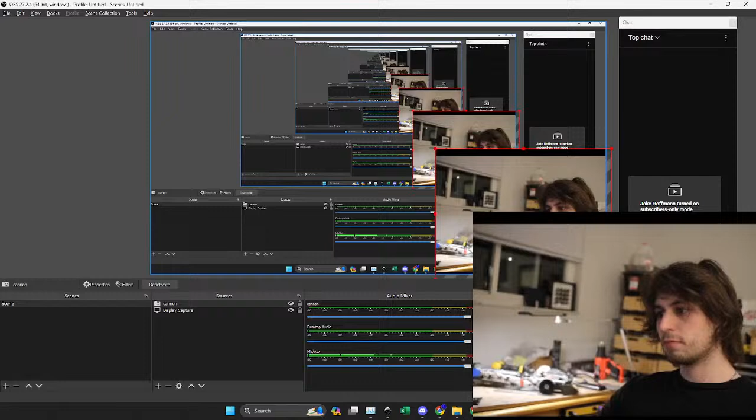Ooh. Yeah. Okay. Cool. Ooh. Does it sound okay? Yeah. Okay. Uh-oh, we're gonna get... Cool. Does it sound okay? Yeah. Okay. Alright.

Let's get a thumbnail on this bad boy while people come in. Does it sound okay? Cool, I'm excited for this. Alright. Let's get a thumbnail on this bad boy while people come in.

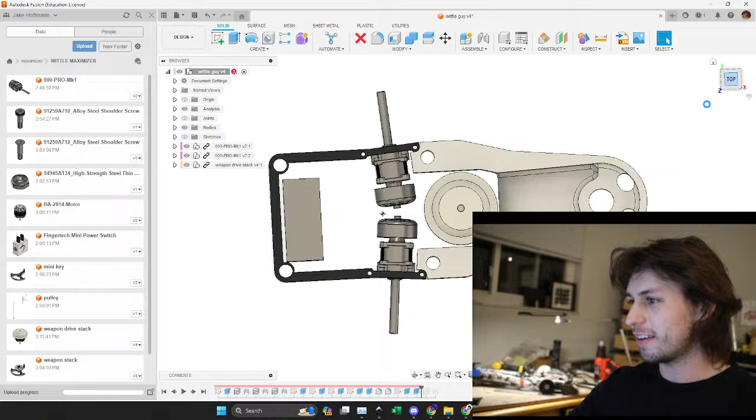And it shows why I have the, right? Okay. It shows why I have the 90-degree gearbox on Max, because this is what you get, which is a massive pulley in the back to get the right gear ratio. And this is just silly. And this was using a 2814, which is pretty standard for 3s is what I read.

But I have all these massive Sunny Sky 5210s sitting around, so it's like, why am I not just using that? So we're gonna switch this over. I realized after that I can just use the 5210.

So let's do that. Is there a way for me to see chat while I do this? Or can I? Ooh. I'm gonna do that. That's kind of mid, but we'll roll with it. Since my face is down, if I do that.

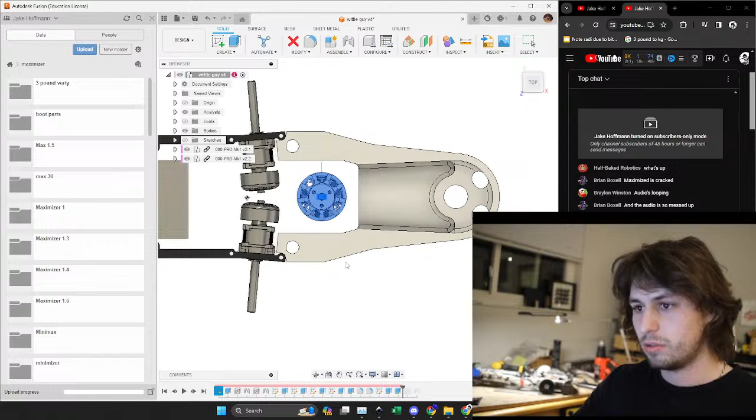This is sick. No, I'm excited about this. I'm excited about streaming this process. I swear my tech skills with the stream will get better, but we're just gonna do this for now. I was also thinking if people wanted it, I've got some friends playing Fortnite right now. We could play Fortnite later. It would be sick.

Okay, I'm gonna copy this over. My headphones wouldn't connect either, so I'm designing without music, which is very weird for me. So if I seem a little... this will be fun. I'll enjoy this.

So I have these aluminum pulleys, but I don't know if aluminum pulleys are too much for threes. I've got them somewhere. I have a box of 5210s, a massive box of 5210s, and if we just go ahead and use that, we can do that. So how tall is this stack as well? 36 millimeter, 1.5 inches.

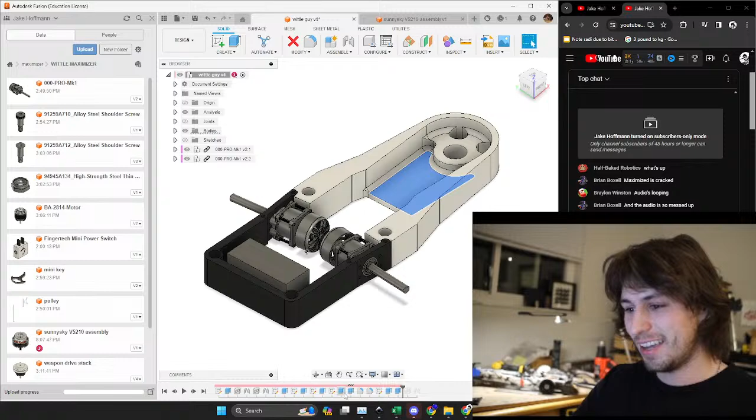I have my spreadsheet as well with all my conversion factors. So the scale factor from 12 to 3 is just 0.632. So if I don't know what dimension it should be, I've just been typing it into this, and I'm hoping it makes it look like I just hit Maximizer with a shrink ray, and that's how I want this thing to look.

But it's also allowing me to try some stuff that I haven't tried in the 12, like mounting the, ooh, this is 60 millimeters diameter. Dang, it's a big boy.

I'm gonna need to bring in some special guests to help me with a 3s. People who know what they're doing, because I don't. See, because that wall is getting too narrow there is the issue. It's like coming in on it.

But this pulley is a nice size. Because if I'm at 300 kV, 14.8 volts, I don't know about what that pulls. But if I'm at, because that's a 1.4 inch diameter. Again, I can probably just 3D print a new nylon one, like the aluminum. I don't know if that's needed

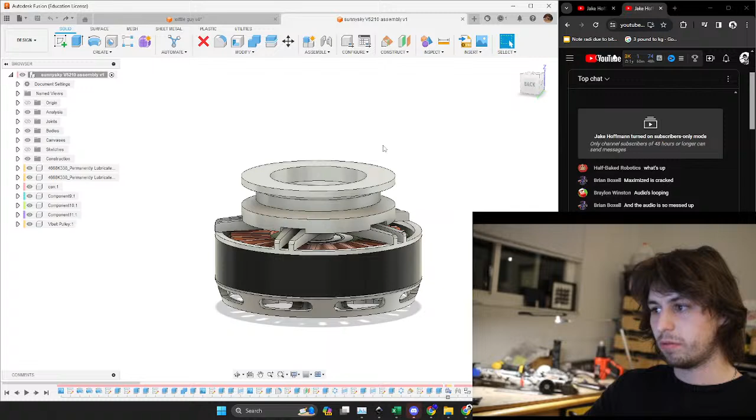in 3s, but if I just go 1.4 to 0.5, 0.4, like that's a nice number there. I don't hate that. I don't know about that number yet, so ignore that. But like that's a fine number there. But that's 1.4 to 0.4. So that changes this stack.

And yeah, the aluminum versus nylon conversation. I don't know where we're at with that right now. Again, this is my first 3s. I don't know what to look for yet. Oh shit! I didn't mean to open that. 0.4. So this is 0.4 over 2. Yikes! Yeah, that's what happens when we do that.

So if I do that, I probably have to run this. If I do the 5210 Sunnysky, it's gonna be really cheap because I have so many that are on the verge of being destroyed, but not quite destroyed, from Maximizer. Oh, wait, I put that in as 1.4. Or 0.4. Here, give me 0.4 inches.

Hang on, my microphone is... I've got it right in front of my keyboard.

Let's give that a shot. Alright. Yeah, so we're still having problems with that. If I'm at a half-inch shaft. Is half-inch shaft reasonable for 12s? Or, not 12s. 3s? We'll find out. So stupid.

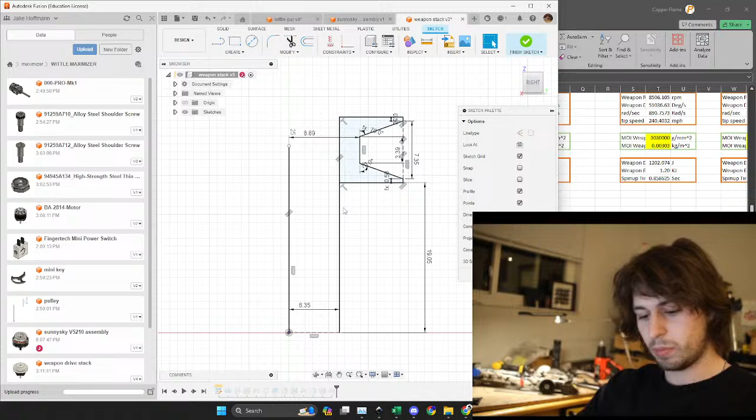Alright, so if I'm at 25, or let's call it 22.2, then we go up to a 0.7 here in the back. That's a larger number, yeah? Yeah, that's a nicer looking pulley. I don't want to go to 6S though in 3s, I guess, because it's gonna make my drive get really hot, right? I feel like everything should be scaled perfectly, including the electronics.

Which is like, do 3s run 6S? Someone in chat, tell me if 3s run 6S. I have no idea. I don't want to do that though. So let's go.

If we do half-inch on the driving, or we go, I mean, we can go all the way up to, I mean, it adds no space to take this up, if that makes sense. Like if we go all the way up to like 2, not 2 millimeters, 2 inches. Oh, shoot. That would be 2 inches. Like it doesn't add any space in the back.

Oops. Okay. Making sure everything looks right. Okay, cool. We're good. We're chilling. I wish Fusion just knew when I wanted inches and when I wanted millimeters. Alright. 0.9. So if we do 1.8 driving and then we can kick this up to 0.6. It's not amazing.

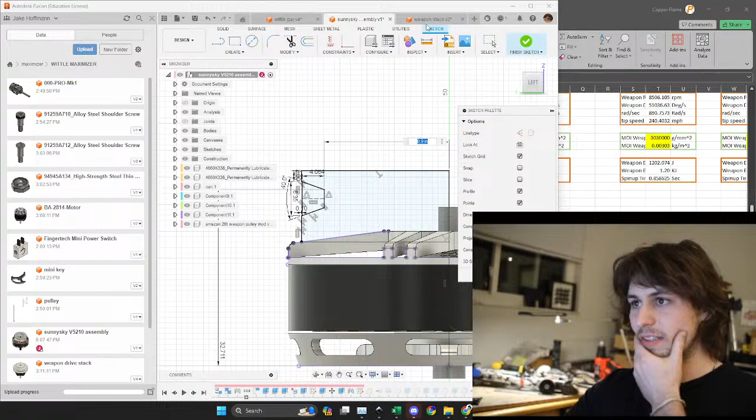And what I mean by not amazing is like how much, I guess this is a little exaggerated here because the thread is 3/8, so the thread is more in line with this here. So 3 divided by 16 times 1 inch. So this is okay, so we've got more wall here.

I'd like for this pulley to be nylon because it makes everything much easier. Because I'm gonna want to change it at some point. That's not even a question that I have. So this is a 3 millimeter wall, plus whatever. Okay, that's not horrible actually. Maybe this will end up being alloy steel again. I mean that's about the right scale though.

Like, and then this has been enlarged. Did I edit the right one? Sure hope so. Okay, yeah, we did. Okay, cool.

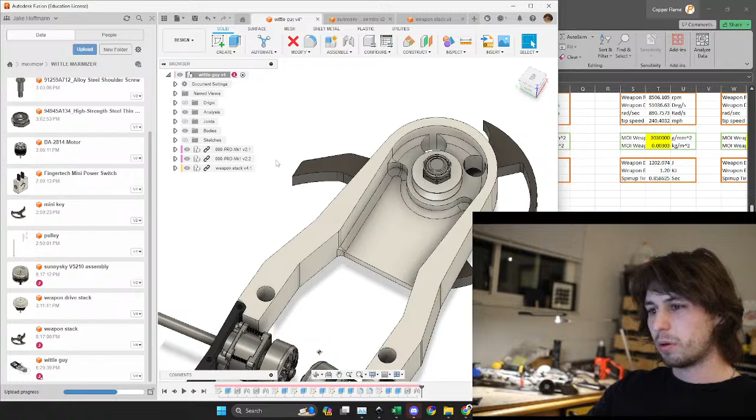And I don't know. I think that gives it a little bit more mechanical advantage than being across the pulley, since it's not loaded when it starts. It just starts in an unloaded position, and then it kind of goes from there.

Okay, so someone in chat said to do a flip. When we hit 100 viewers, I'll do a flip. Real. That's a real dare. All right. Thanks, Kenny. Okay. Where were we? Yeah. Okay.

So is this a function? Okay. So I like in Fusion to make everything functions of other stuff. I don't know if that's weird, but like, oh, awesome.

I think my camera just turned off. Oh no, it's still working. Okay, cool. The shutter just, I guess every 20 minutes it's gonna do that. Cool, okay. Well, it's still working. Whack! Actually, I should ask how the audio sounds. Yeah, that's definitely real. Okay, cool. Okay, we're good. I'm not doing a flip at 100 consecutive viewers. I lied. I lied.

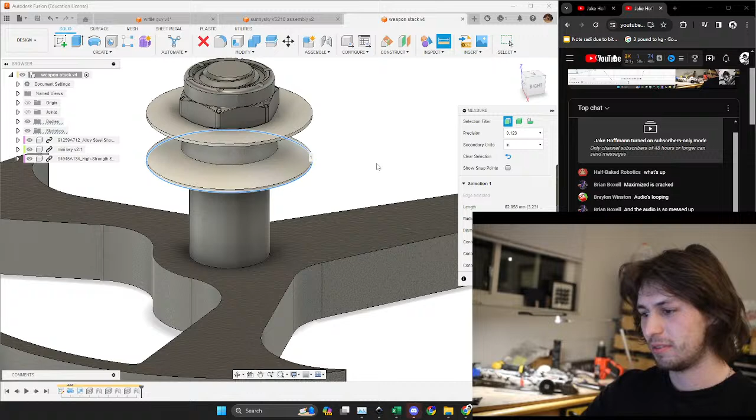Oh. Alright. So, where are we at with our weapon stack? So this came out to, that's much nicer, that's like an inch. It's a way nicer diameter. So this is my outside, this is my internal clearance, and then this is my pulley diameter. So let's have that plus, I don't know, 6 millimeters of clearance.

So yeah, okay. Again, this is what I'm talking about. There's so much little stuff that happens when you design. It's just little minutia that helps so much. And yeah, it gets lost when you edit it out. So

these are now constrained to that diameter, and then I can just plug this diameter in. So it's around 26. It's not 26 exactly, but it doesn't need to be. This is a much nicer tail shape. I like this tail shape much more. This is a little funky right now. We can fix that. Yeah, look at that. That's looking like a thing that we could build.

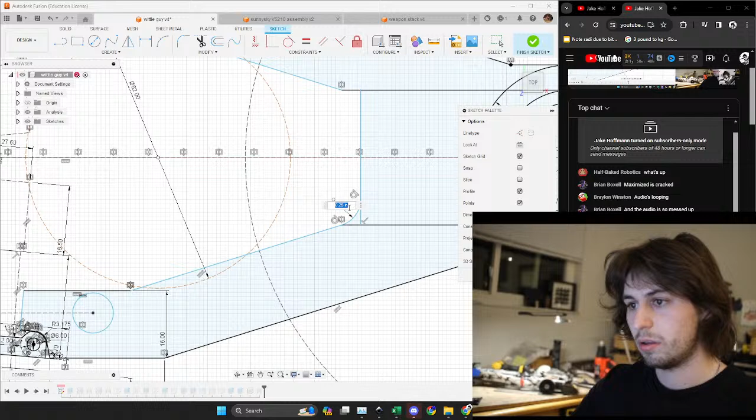Let me get rid of that. I'll show you why I don't want that to actually mate there. It's because I'm gonna put a radius on here for the tool bit to come in, and I want these faces to be flush. If those were flush, it wouldn't mate properly. So I'm just gonna throw a 1/4 inch radius on this so that I can hit it with a, so I'm gonna kick that up to 0.3. Whoa.

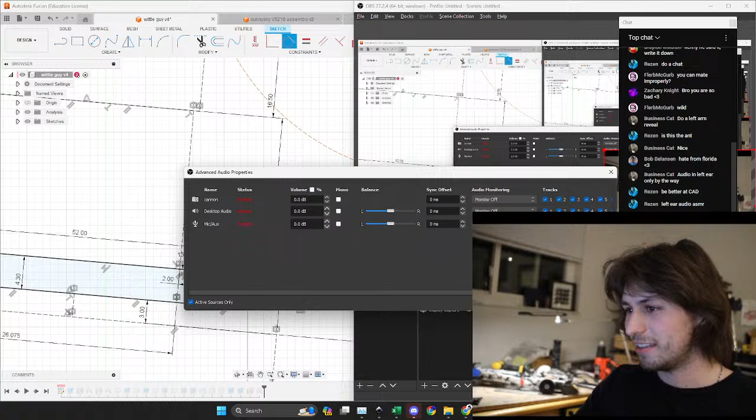Shut up, Zach. Do a left arm reveal. It's on my right arm. Can you see it? It's still there. And this, I burned it taking it out of the oven, so it's not as cool. I'm not bad at CAD, dude. Jeez. Lay off. What's that one video? Dominoes ain't bad without somebody in your ear telling you it's disgusting. I'm not bad at CAD without somebody in my ear telling me I'm bad at it, okay? Left ear audio ASMR. Is it only coming out the left? Ooh, yikes. Because I can make it mono. Aiden, help. Oh, yeah, here we go. Okay, mono. Did that fix it? Nice. Let's go. We're learning how to stream. Hype.

Now, next step is learning how to use Fusion 360. So if we can know those two things, we can maybe get this done. Okay. We'll see though. All right. Well, that just broke my model. Okay. Ooh. That's looking much nicer. Okay.

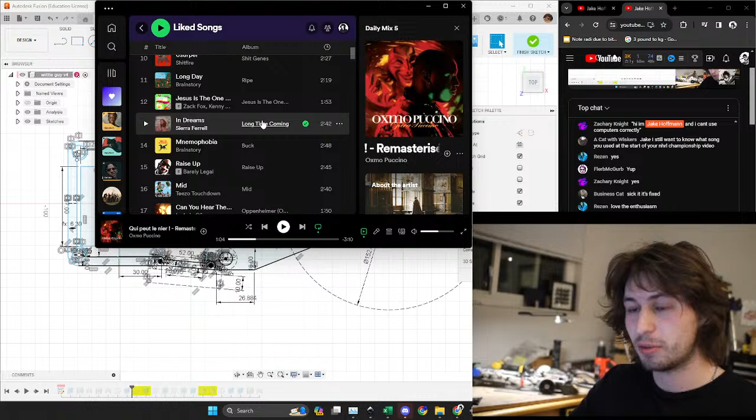Jake, I still want to know what song you used at the start of your NHRL championship video. Yeah, one sec. Spotify. I don't know how to pronounce the name. It is in my liked, however. It's by Brainstory. Mnemophobia. From their album Buck. It's pretty good. I listened to it too many times, so I kind of ruined it for myself. That's the saddest part about using music I like in my videos, is that I ruin it for myself, and then I can never listen to it again. But that's the sacrifice you make. Okay.

Now here's a good question. On the 12, I have an asymmetric tail, so one side is thicker because I prefer to swing that direction. I'm wondering if the 3 is gonna need the same thing, or, I don't know. I made the tail asymmetric on this, and then I ended up getting hit a bunch on the wrong side. You can see there, the red is where Sombra hit me, and that wasn't supposed to happen. So, we'll see.

Yikes. That is looking a little thin right now, though. It doesn't look like the 12 enough as well. But we'll get to that. We'll make it look like the 12, okay? Once I figure out how to build a 3, we can make one look like the 12. I also want to keep this part one op. I don't want to be doing...

I have UHMW left over from the Max Tails. I have a massive L-shaped block. It's my big L. And I'm going to be turning it into a big W when I make this 3, baby. Let's go. Hype. Yeah.

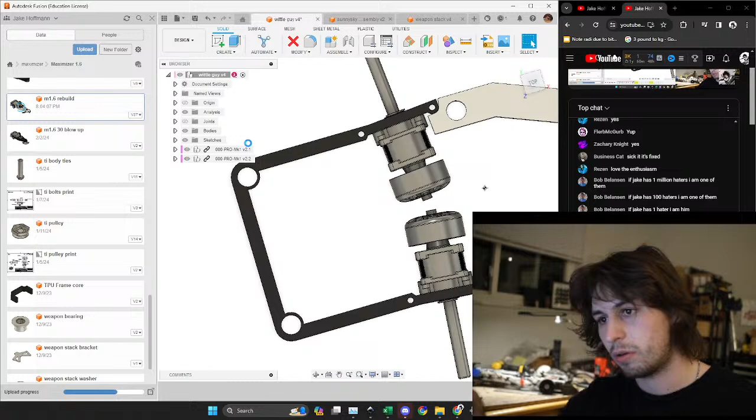What material is the black part? TPU. So I'm thinking that on the 12, where is it? Let me just open up the 12 for reference. It's got a TPU frame, like, core. But for the 3, I want the TPU core to also be the mounting point for the plow. So the idea is this takes over the job of these gussets here, and then I just use holes here to bolt it to the TPU.

You could also Shazam it. Shazam exists. I Shazam stuff all the time. I Shazammed the entrance song for NHRL. It's called The Boom Jiggle, but that's a conversation for another time. Chris, why are we using songs called... oh, this is crazy. This sucks.

All right, let's radius this. So you see how that mates perfectly? That's what I want, because that's gonna be nicer to machine and overall nicer. That was a big learning lesson from the 12, actually how to integrate that CNC stuff. The other cool thing that I get to try with the 3 is that I'm...

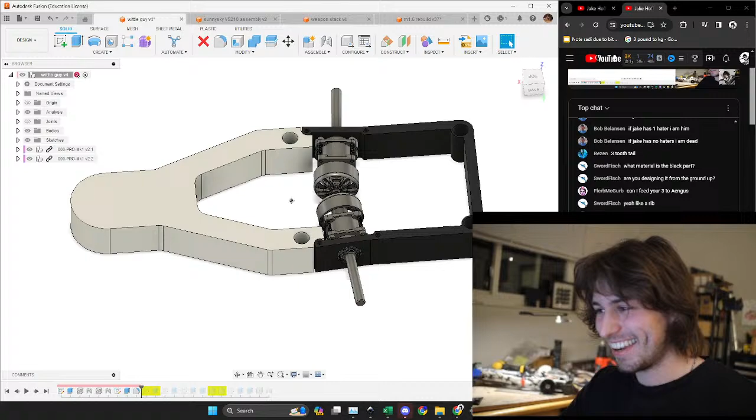I already... alright, Zach's gonna... I'm not responsible for Zach's permaban from YouTube when he says inappropriate things on my stream. My grandparents follow this page, Zach. Please behave. Jeez.

How do I pick the angle for the wheel cant? I don't know. I'm guessing right now. I think I've got it. See, okay. Actual serious design advice. This is why nothing here is set. It's all relative to itself, if that makes sense. I only have a couple dimensions in this. I know it looks like a lot of dimensions, but if I zoom in here, it's more constraints than it is actual dimensions.

So if I come in here and I don't want a toe in, I can just hit 90. Okay, and then it breaks. Awesome. So yeah, I can just hit 90 and then it fixes everything to that dimension. So everything's fixed, sort of, and it's defined relative to itself.

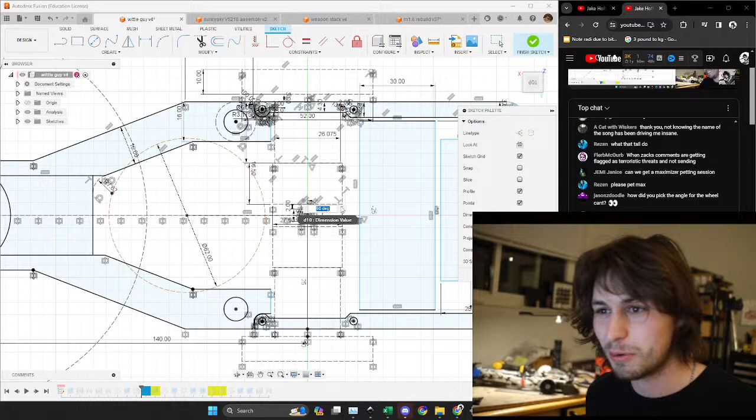Zach, if there's ever combat robotics betting on FanDuel, I would bet night after night that Threed is on fire. I would do that, Zach Knight. I would parlay that. I would parlay that with me not knowing how to run Fusion 360 night after night.

Okay. So I need to figure out. I like that. Well, let's follow this a little bit more. Where are these coming from? Oh, those are okay. We need to make sure that our belt can fit from this motor, and also we've got a wall colliding with our motor right now, so that's not cool. So drag this out. Woo. Yeah, that's looking better. It's looking a little bit more proportional.

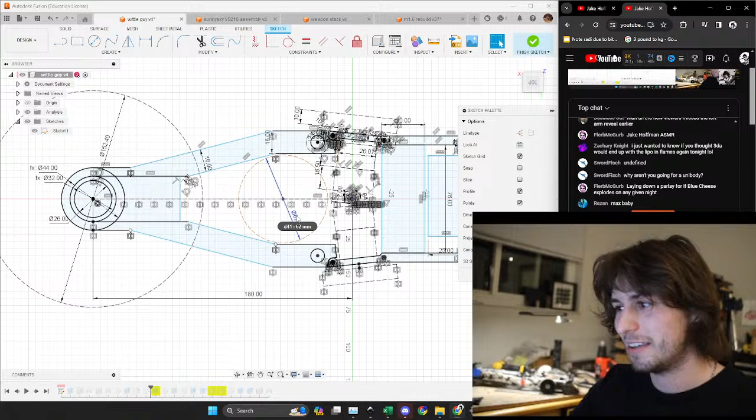Shampoo. Why are you asking about shampoo, Matt? You're bald. Favorite video game? Probably Fortnite with you, Zach.

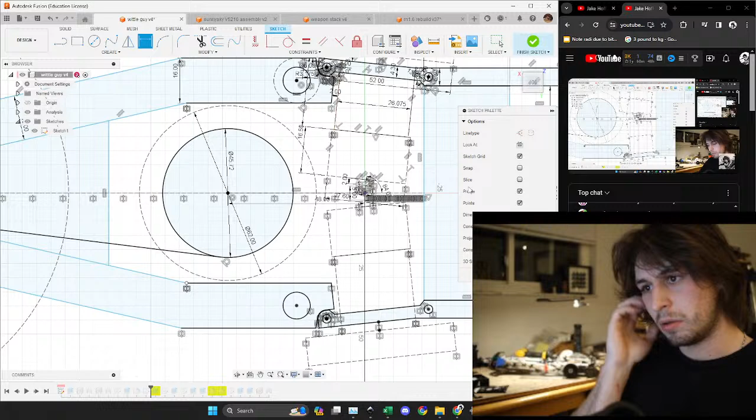Okay. Let's make this parallel. Wait. Let's lock this position because this position is going to be important because I got to make sure there's enough room to route the wires from the Sunnysky back into the ESC, because they're going to have to go in between, or probably more up and over. If they can go up and over, that would be cool.

I started going up and over with Maximizer's wires, and that was cool. That was a big upgrade. Just made a lot more space, and I didn't have to cram them down inside when I was putting the robot back together. So if we could go up and over, that would be pretty cool. I also need to look at the other Thagomizers in the 3-pound class that I can reference. Okay, let's not do that actually.

So like Bulkhead, Kitsune, Bulkhead's got a lot of development behind it, and I've had the opportunity to talk to Rita on a couple of occasions. She's cool, and Bulkhead is sweet. So I can actually reference theirs, and maybe I need to sit down and actually watch them fight a little bit more closely, because it might show some stuff that I need to be aware of when I design this 3.

Those are kind of thick walls for a beetleweight. Do you think you have weight? Bulkhead had bending issues. Bending where? Is it bending through the chassis? That's a concern I have with the 3, is that the UHMW is not nearly going to be stiff enough. Also, we're going to need to bring this in. Okay, this is getting weird quick. We're going to have to add an additional chamfer here.

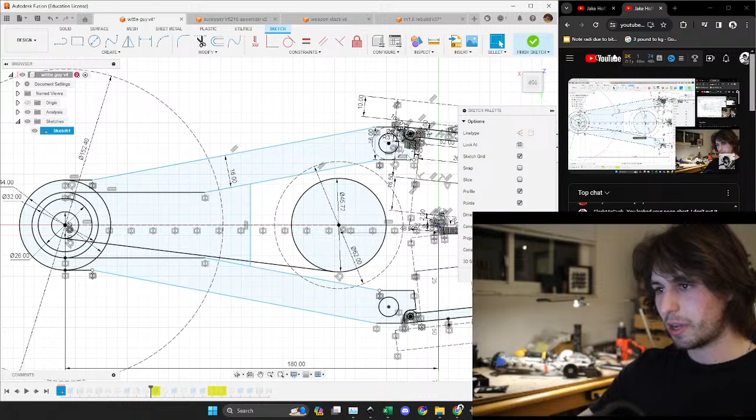Micarta. What is Micarta? Oh, front to back belt tension issue. Yeah, that's a potential problem. I've never had belt tension issues with Max, funny enough. But yeah, that's definitely something that we're gonna need to look out for as we build this. All right. Wow. All right, that broke everything. Cool. Awesome.

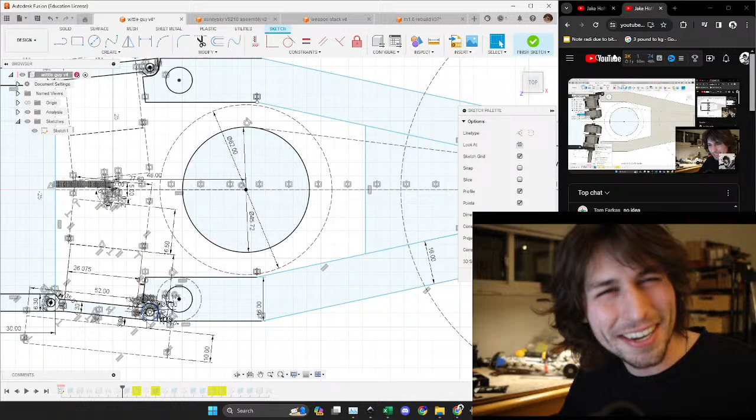Hi, Kazaya. I'm coming to your weight class. Nowhere is safe. Nowhere is safe. Get out. No. Please don't bring Kitty 12. No. There's enough. I'm already afraid of the... Ugh. I feel like that's such an insult. Stay in your weight class, okay? Stay in your weight class. Just something catty to say to someone. Stay in your weight class. All right.

Yeah, the March Ohio competition, Aiden. Yeah, I want to take it to that. Just because that's gonna be 3s only, but it's gonna be so close. Ooh.

Tom has 3 ants. Ant weight bonus. Are there weight bonuses in ant weight to make like a 3-pound bonus in weight, like a massive 3-pound bonus in the ant? I'd like to do more ant competitions. Oh yeah, May. Sorry, not March. The location hasn't been announced yet, so there's not a ton of details.

Ooh, horizontal saw. Very cool. All right.

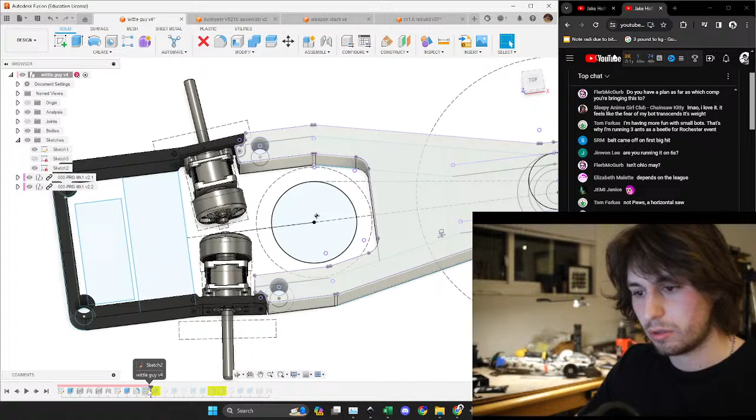So I want to keep this. Well, okay. Let's throw our motors in here. I have a bunch of stuff in here from earlier, but I didn't like how that turned out, so we're just gonna delete all that. Even though I did like that concept where the motor was kind of held out. So let's bring in this 5210. Oh, yikes. That thing is massive. Okay, maybe this motor's too big. No, that's fine. Look at that thing. That's funny. That's awesome. Oh my gosh. That's so huge.

It's funny because that's the same size as what I ran. Wait, let me open up this. This is an old one. Hang on. It's that I have a box like this big of the exact motor that I need. And people were yelling at me like, "Oh, Jake, that's a Beetle-sized motor. You're going to burn that up." Well, yeah, it was the only thing that would fit. So yeah, that's hilarious. Okay, oh wait, that's 1.6 rebuild. So that and that take the same motor. Perfect.

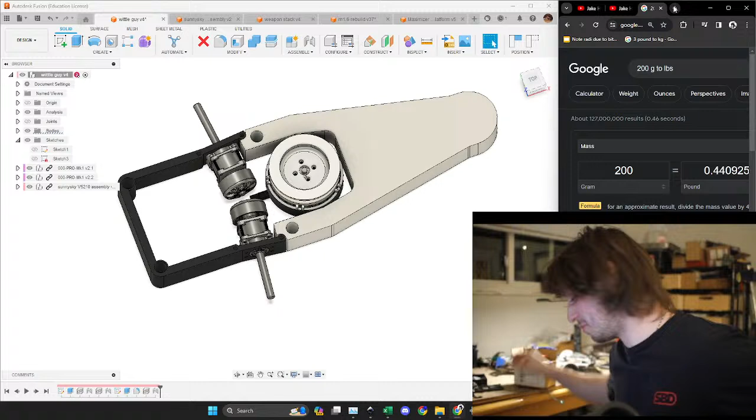It's 200 grams, so 0.44 pounds. Ooh, yikes. That is a large motor. Maybe I was overly ambitious with that. Is that real? Let's weigh one. Okay, yeah, it's 0.44 pounds. Well, that's a bummer. That's 15% of my weight in weapon. Yeah.

Drinking game. Every time Jake says yeah. Okay, Aiden. I'll stop expressing. Fine. Yikes. Okay. Let me go get a glass of water while I think on my sins.

Ooh. Well, at least it won't have startup issues. What's my weapon stack setting at? Okay, 234. That looks about right. 234. All right. Well, okay, so weight's gonna come from a lot. On the 12, the top cover and bottom cover are aluminum. On the 3, they're gonna be Garolite. I'll go with like 3 mil Garolite.

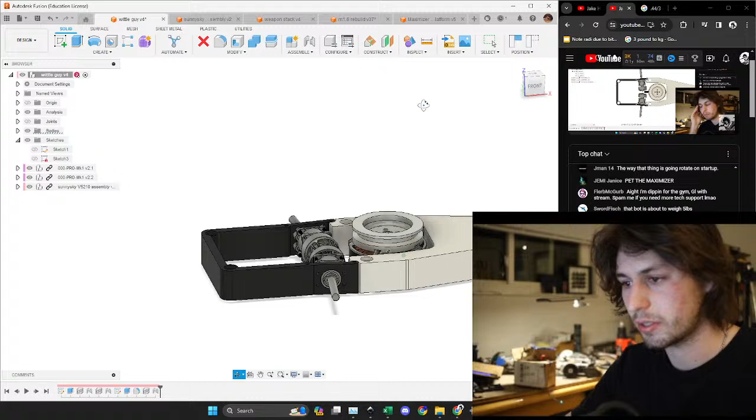Yikes. That's a big motor. How thick is this right now? Oh, we're at an inch. I have 1.5 UHMW, so I can bring this up half an inch to protect that, and I'll probably throw a Ti cover. 3mm Garolite's thick. Okay, maybe I'll go lighter with that then. We're gonna trust the process though.

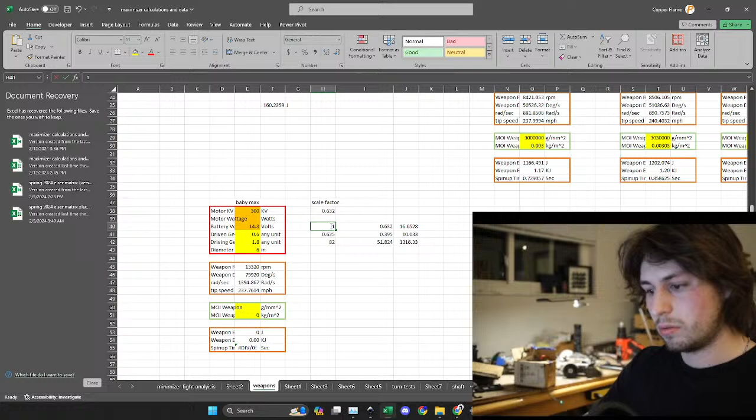As far as batteries, I looked at the Lumenier 700 mAh 4S. This looks to be about what I need. It's 30 tall. So if I accept that, that's gonna make the chassis taller. So let's do a 30 millimeter chassis. That looks a bit more reasonable with the scale of everything.

Another question that I have with the 3 is, is the UHMW slick enough that I could just put the weapon into it and spin it with no bearings? Do I actually need to run bearings on this, or can I just not? That would be very cool. 1 inch. Oh wait, that's the wrong one. That should be construction. But if I just lubricate the weapon shaft and stick it in the UHMW, just let her rip, what's the worst that could happen? It's designed to be slippery, right? What's the big deal? Maybe it'll jam, maybe it'll get hot.

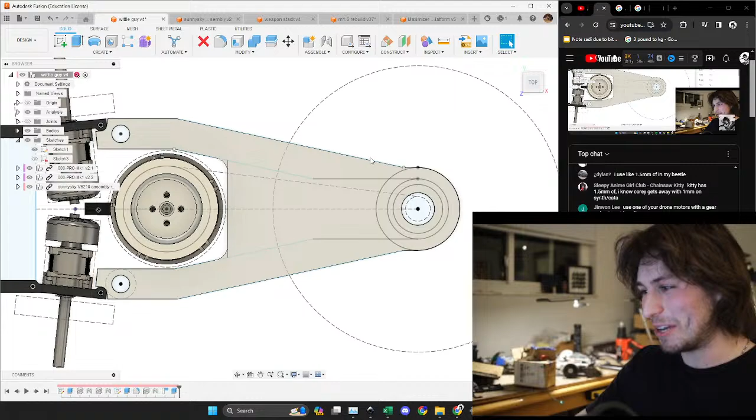Live shaft through UHMW, because I says no. L plus no bearings. Okay. Look how much motor I've got behind it. It can just crank through the friction, okay? It'll get hot. You should do it when we fight. Yeah, thanks. Okay.

I think weapon stack, because this is 0.625. Okay, so this needs to be 0.5 inches. That needs to be that big. And then if we just brought this to this face, and this up. Looks just like the 12. That's dope. I don't want to do 2 ops on this part though. That's gonna be a pain. I don't think it needs 2 ops either. I think it will be just rigid enough with that.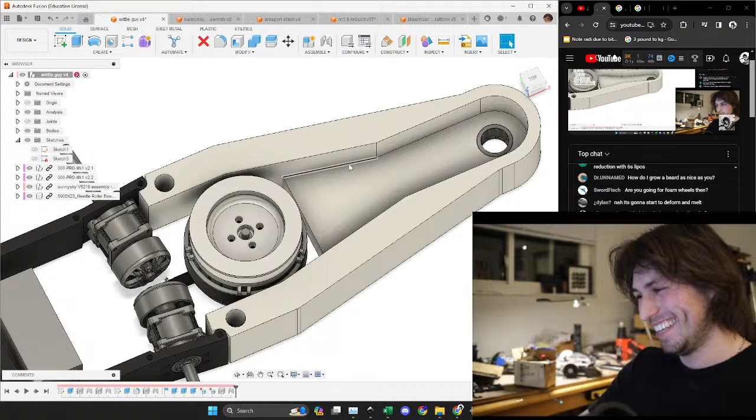There, bearing. You happy? We'll do that. Okay, I have a bunch of the motors. I don't want to spend money on this. I hear you, Dylan. I don't want to do flange bushings. Bushings get hot and seize. Now, I don't know. What RPM am I? Yeah, see, I'm at 13,000 RPM. I don't want to do that. That is something that I considered, though. I would rather just shove it through the UHMW than have bushings. That is a consistent opinion that I hold. I'm not being inconsistent.

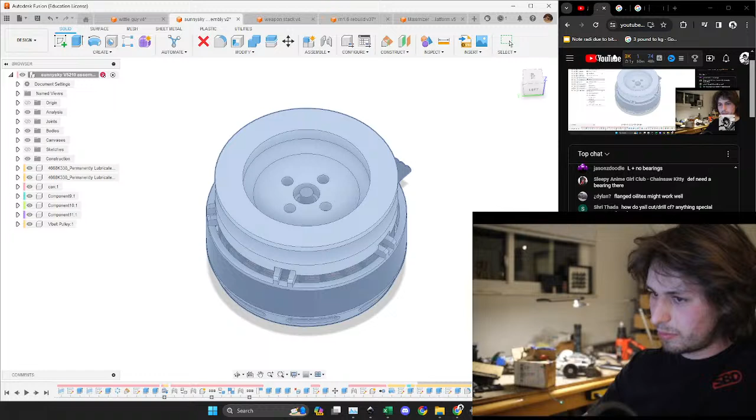Let's go. Let's make this plastic. If this is plastic, how much is this at? Because my drive is already at 160 grams. Okay. That's probably a little low, but about right. I also need to figure out center to center, like, the distance that it should be.

Okay. Let me figure out the distance between these pulleys and then I'll comment. If I need a 10-inch belt... yeah, and don't ask me why I don't make this calculator back solve. I am too lazy to do it. I would rather just type in numbers until I get it right. I use that calculator every once in a while. It's not worth it. Oh, I already have a dimension there. Yeah, see, master sketches are great. You'll always know exactly what you need to find.

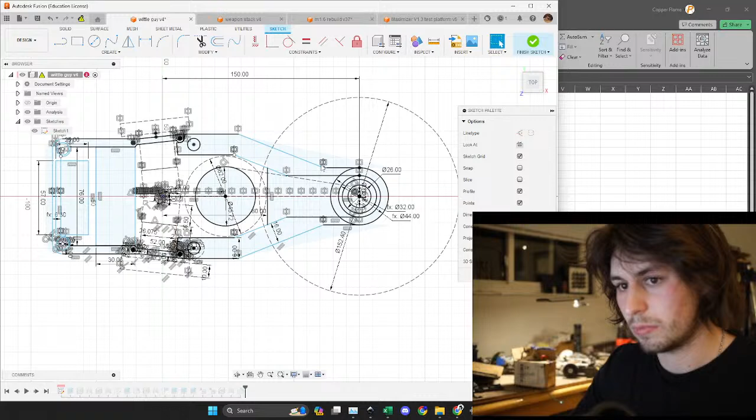Oh, wow. I'm going to run much larger than a 10-inch belt. Yeah, I'm going to end up running... because this is 150. I mean, maybe this is sitting a little long. Maybe we bring this in. Okay, why is that doing that? Let's actually not change, please. Thanks. Cool. It's kind of cute. I'm a little worried if those overlap though. I will hit myself and I will destroy my own weapon motor. So let's go 160.

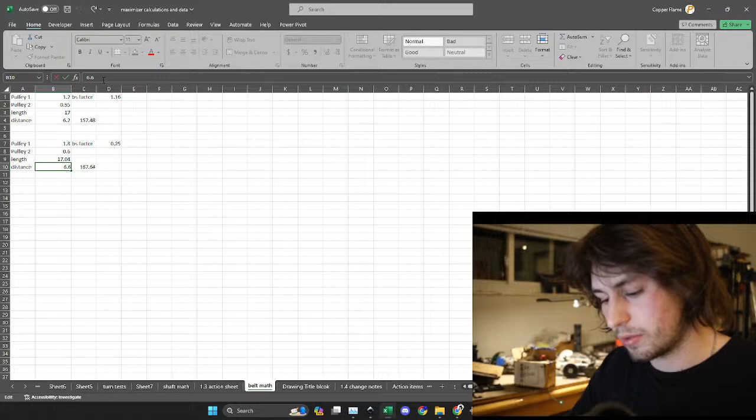But obviously we have to round to the nearest belt here. So let's go 6.7. 0.6. Nice. Yeah. Oh, no, wait. I need to find the nearest belt. Ooh, I was calculating the wrong thing. Okay. Hang on. That's what I need to find. Okay, 6.54. So if we crank that up to 166, that should be exactly where we need it to be.

"Tell us all about your big horizontal plan." Big horizontal runners in my chat trying to get me to tell all my secrets. "You will tell us about your big horizontal plan, Jake. You will. You have to. You have to tell us about your big horizontal plan."

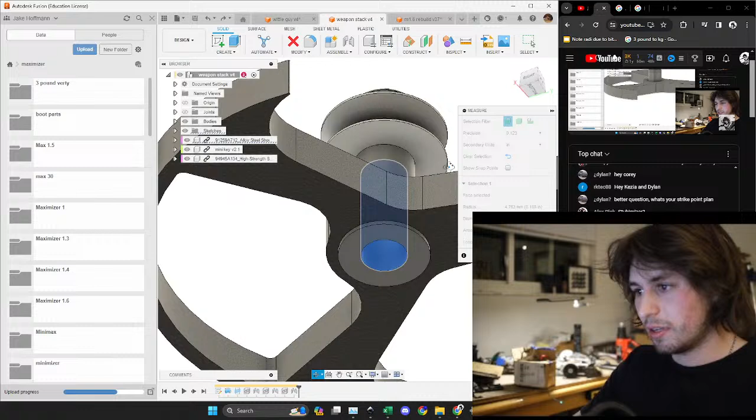All right. Let's get a weapon in here, yeah? So the weapon stack is the exact same as the early Maximizer stack with just an off-the-shelf shoulder bolt. Nothing custom. I'm assuming I can just ride on this bolt and be okay. And I think I'll core it out to 3/8, but I might step it down a little bit in real life. So we'll see. It's my big horizontal plan. Oh my god. I think I'm gonna try to hit them. If that doesn't work, I'm gonna try to hit them again. I'm not trying to be facetious when I say that.

What is my ram plan? His new bot looks dope, by the way. Frank plan. It's pretty terrifying, just because I know he's had it for a long time, and so it's very, very developed, and that's always weird with a new bot to walk into, especially going to Motorama, walking in with a bot that is known, it's got its problems figured out, all that stuff. I think Biz Cat is gonna do very well with it. It's a really cool robot. I like the welded airframe. I'm a big fan of the welded airframe on Carmen, and I think it's in the same vein.

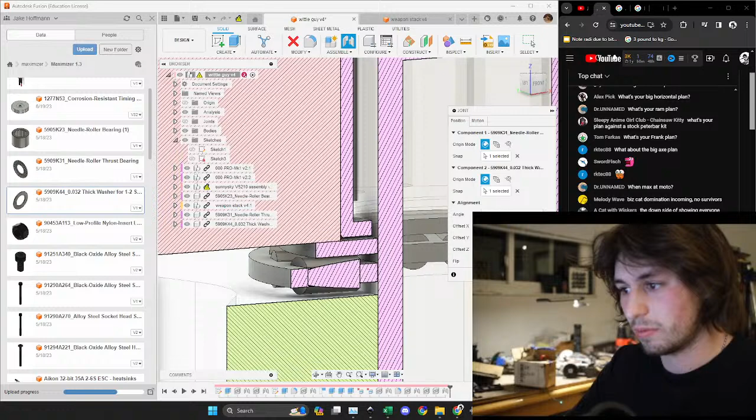Max won't be at Moto. I'm working on UC's bots. We have a ton of bots. We have 7 robots going to March, 6 of which are 12s. So we've been getting all those together. We just had 2 big manufacturing days over at our makerspace, just getting everything together. It's been quite the ride. Just dealing with problems. Everybody's got something unique going on, and that's fun. So with all that overhead, Moto's not happening this year, but hey, maybe next year.

I think I'd get smacked at Moto, because the cage is small. And I think a thing that I benefit from is how large the 12-pounder cage is. Cage to weight ratio is very high. I think that's why there's no walkers in 12s. It's a lot of 4-wheel drive verts. I think they all play off the fact that the cage is big. I think it allowed me to do very well in 12s. I do not think I'd do well at the Moto cage. It would teach me how to fight like an animal, I'm sure, and I'm sad that I'm missing out, don't get me wrong. I did want to go. I love having my ass kicked, because you learn a lot, and then you make your robot better. It's tons of fun. That was not an invitation, Tom. Mr. Farkas. Stay in your weight class.

Stay in your weight class. That's such a unique insult. Oh my gosh, that's so catty. I love that. Yeah, Kitten Mittens was, yeah.

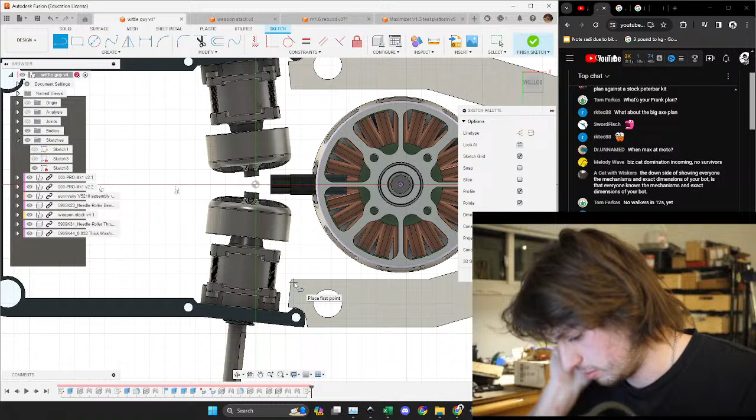Kitten Mittens is one of the ones that works. Kitten Mittens, yeah. I don't know how it would do today. I haven't been in this sport very long, so I can't say, okay, Kitten Mittens would suck in this field. But I can't put a finger on how it would do. I'm sure Luke would say the same thing. And maybe I'm just making stuff up right now.

Kitten Mittens is one of those bots where the blade is so slow and so heavy that it doesn't need any speed to get engagement. Silent Spring will dive from the other side of the arena and get a ton of engagement, even though it's a walker. I don't know if Silent Spring is a good example because it's so fast. Droopy's slow, but it gets a ton of engagement because it's moving big blades slow, and Kitten Mittens is the same situation where it's moving a big blade really slow, and then it gets an insane amount of bite because as soon as it contacts you, it's gonna break you.

All right, I'm hunching forward in my chair again.

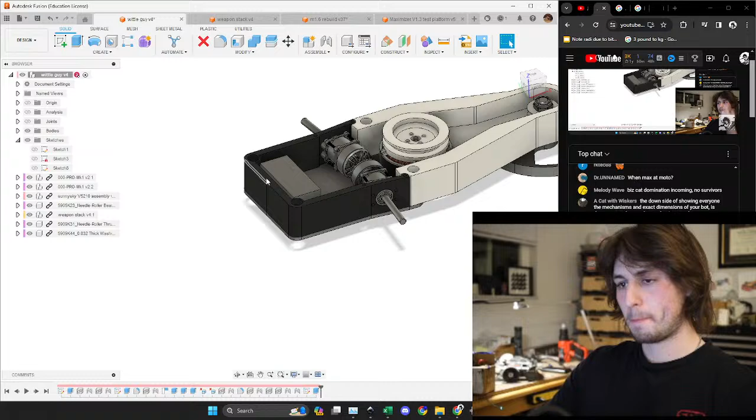All right, so that's what that panel looks like. And then the top would look something like, let's project from that first sketch there, so that we can reference that plane. And then over here. I'm just trying to get a general idea of what these covers look like. This is nothing final, we're just doing the gross tonight. We'll come back and we'll detail everything in.

Stop asking me my plan to fight different bots. I don't know. How would you fight an 18-pound Paws? How would you fight a 12-pound kitty? I don't know. It's not a good question. It scares me. I don't want to think about that, man. I'm trying to relax and design stuff. I've invited you into my safe space here. You're stressing me out.

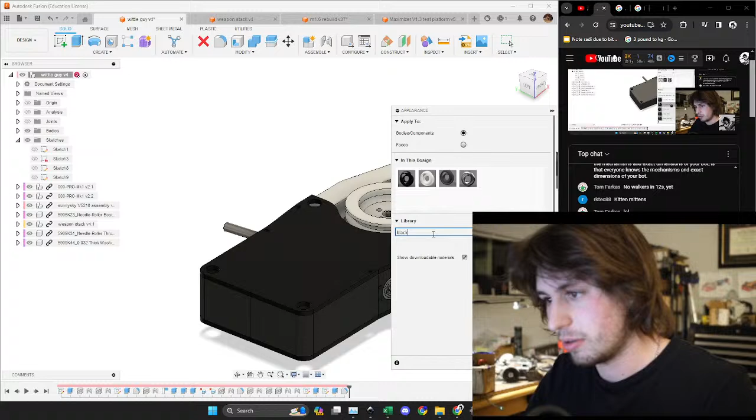Yeah, that looks pretty sweet. I wish Garolite, the G10, has this nice dimpled surface on it. Man, I wish that existed in the Fusion 360 library, because the metal flake adds this weird thing. Maybe I'm being too particular. Maybe I just need to put gloss paint on everything.

Okay, the other thing with these gearboxes, I've got them face mounted now. These are Peter's pro gearboxes. I don't know if they're gonna be too much because they are 80 grams each, and oh god. I've just got them face mounted right now, but for the top and bottom covers I'm gonna have some permanently installed TPU to sandwich it, and I might even just hot glue the TPU to the Garolite, and then when the 4 main bolts tighten it down, it just clamps the whole thing. So we'll see about that.

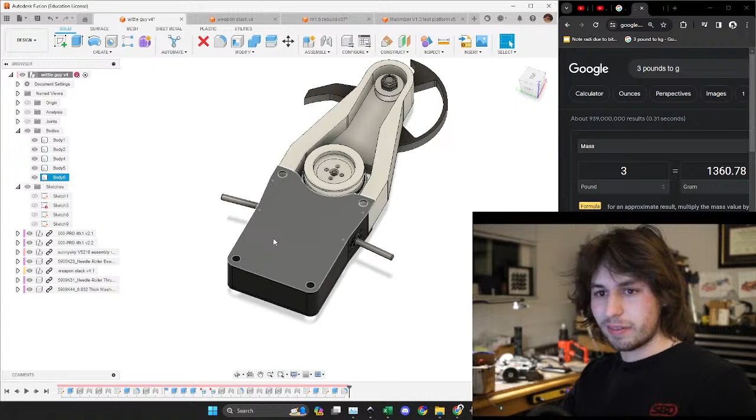Oh. All right. Here's the real question. We haven't even touched the plow yet. Let's set this to FR4. What are we at weight-wise? And this is the fear. Yikes. Shoot. We are... Oh, wait. Hang on. False alarm. This is set to a steel block here in the front. Let's set this to magnesium.

Fun fact: if you extrude your batteries in the volume that they are and set them to magnesium, it's roughly the right weight. It's very close. I learned that recently, and I thought it was a cool fact. Okay, so that's no longer a steel block in the front. So we're aiming for 1360 grams. That's not much better. Ooh, that's a bit tight on weight, isn't it? That is not bad.

Your face is over the weight. Oh, your face is over the weight. Okay. We're being robbed. Okay.

For reference, we have 300 grams to play with, so we are not even close. Repeat Pros are probably too much for drive. I picked the Repeat Pros because they look like little P6s and I thought they were adorable. Are they that much heavier than the Repeat Maxes?

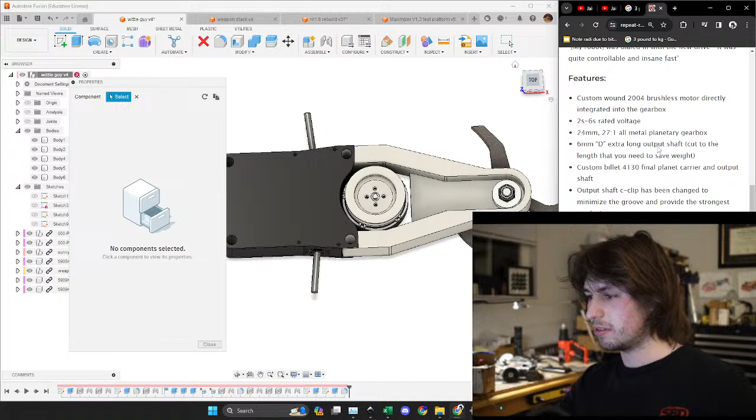No, see, they're okay. Well, they're okay. They're heavier. 70 grams. No, I'm not gonna say the funny number. Jeez. And these are the pros. How big are the pros? Oh no, those are the magnums. I was like, 250 grams? What are you talking about? 80. So it's only 10 grams of difference. Plus these are cute. Okay. So it's not too much different.

And I'm gonna cut down the shaft, which is gonna remove a couple grams. So the difference is kind of negligible there. If the weight's gonna come from anywhere, it's gonna be the weapon drive motor. Okay. MaxBot that doesn't have motors with Max in the name? Yeah. Yeah.

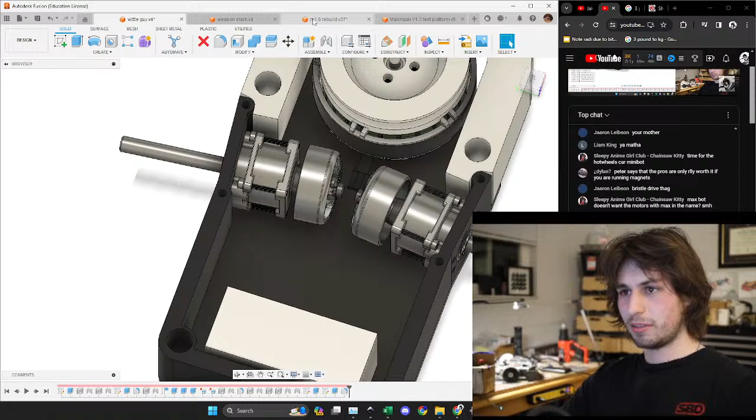Yeah, this one, but look how cute these are. They look just like the 12s. Look how cute they are. It looks the exact same. That's adorable. I might even paint them silver and red so they just look like little ones. That's so cute. But with this massive motor pocketed right next to it.

Okay, so we need to do a couple things. Our bearing stack is kind of screwed up right now. We don't have enough room for the tapered, or for the thrust, which, yeah, that kind of sucks.

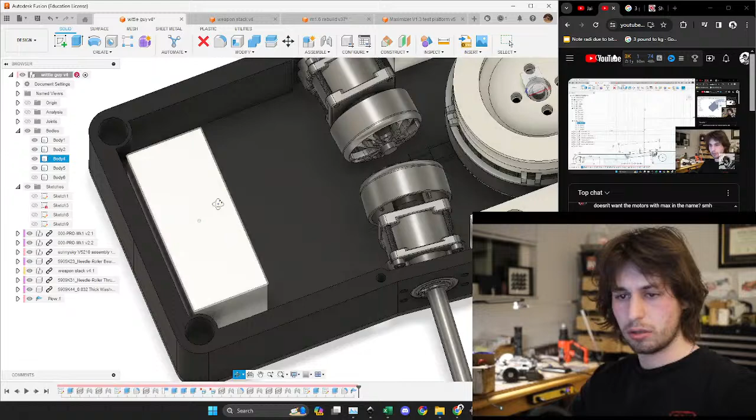Use not a 5210. Yeah, but I have a bunch of 5210s, okay? I don't want to buy more motors for this. All right. Let's make a new sheet metal component. So this is where my plan for this thing is coming to fruition, using this. Why is there this line here? Oh, that doesn't matter. Okay, weird. I want to use this front TPU as the plow mount, because all I have to do is form the plow, and that's a really easy operation over on the bender.

So if we make a new sketch here, okay, let's mock up some wheels real quick before we do this. The wheels on Max are 82. The wheels on the Max go round and round. They're 82 millimeters. Oh, I already had that in there. So if we go to 52, that will be a perfect scale, which will be very cool. Those are going to be potentially a little small.

Use chat pop out chat. Oh my god. Oh my god. Oh, that's... Can I pin this? Can I pin this? Size. I can do this.

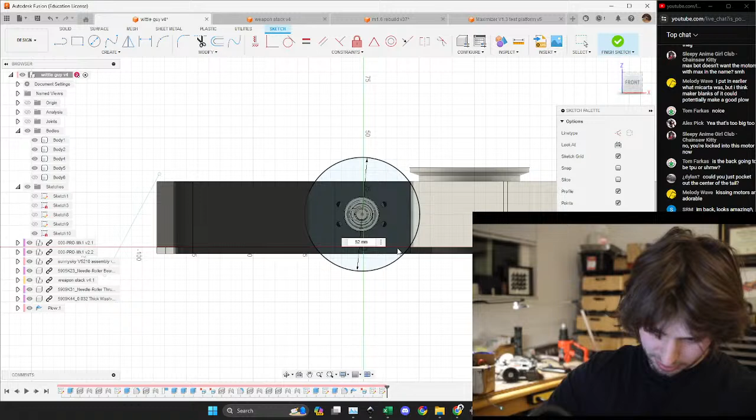Yeah, barely clears the motor. Yeah, that's not good. So we're gonna need to go up to like a 60 millimeter wheel. All right. That looks like a wheel. Perfect. Done. Wheel. Cool. All right. So we're gonna have to go up in wheel size if we keep this motor.

Wait, is Johnny in chat? Oh god, I didn't recognize his name. I hate that kid. No, that's not true. He's a good kid. He's just on the wrong path.

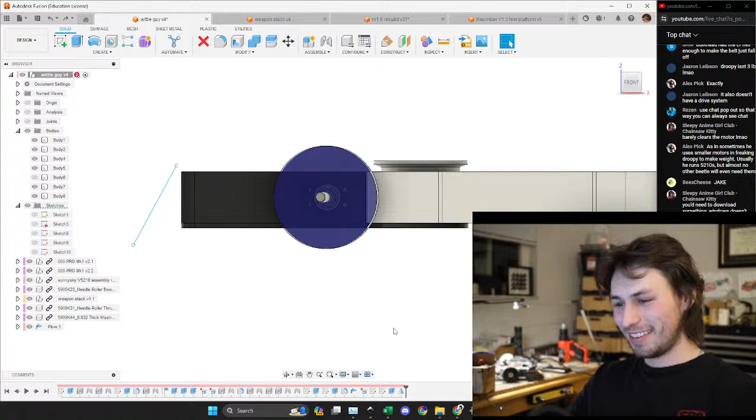Okay, let's design the plow then, now that this is ready. Oh, shoot. Clip it. Clip it.

A new motor's only like $20 to $30. Yeah, that's probably true. I guess we are playing with threes. I'm used to spending $80 on a motor and never wanting to get a new motor. Because if I do a 2814, the issue becomes the same issue with the 12, which is if we want to get it in a compact chassis, there has to be some sort of additional reduction, because the pulley has to be really small in the back so that I can still swing and keep my center of mass nice and tight.

So I have to come up with a different way to reduce this, because the KV is too high. And if I go down in KV, then the wattage is too low. And if I go up in motor size, then I'm back where I started. This is the roundabout game that I played with the 12 until I just gave up and threw the 90 on it. Because Cobra's not much better. Those are way too small. Because Kitty uses a 28mm Cobra. It's a big one.

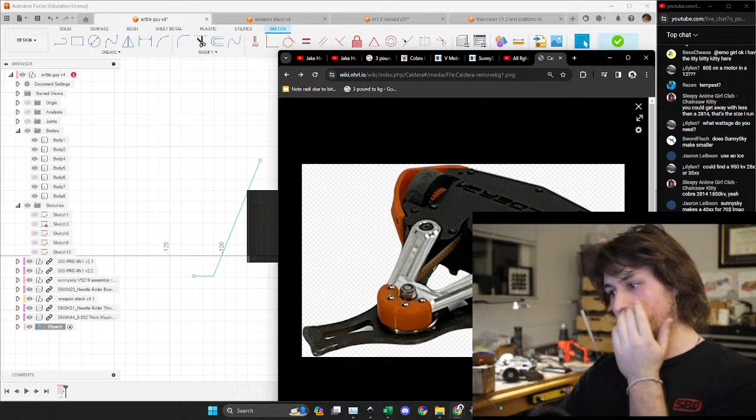What does Caldera run? That's another good question. Is Brian still in chat? Oh my gosh. Why doesn't it just automatically show NHRL results? I don't understand. 3530. 2814 850. 2814 850 is a Badass size. No, it's not. Badass has a 2814 870. That's not horrible. 600 watts. Is 600 watts not enough?

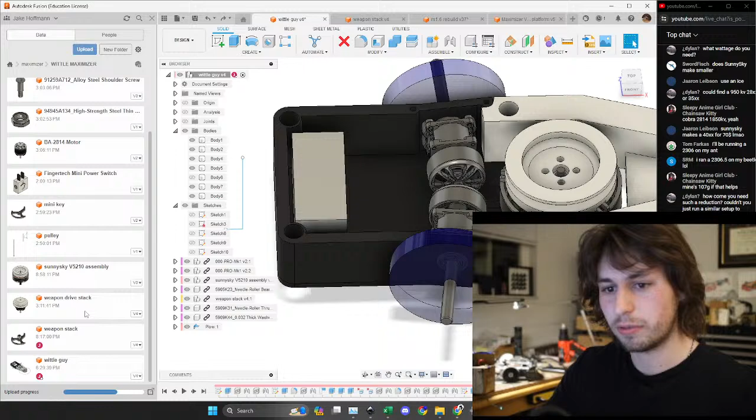Okay. I mean, if that sounds good. I'm pulling 700 out of this and it's 200 grams. I hate pancake motors. All right. Do I want to revisit that? I want to design plow. Give me plow. All right. Well, let's revisit the 2814 because if I have a 2814, I have a model for it. You're gonna see all my screwed up folders. This is what it came to. 2814 with the specs that I had on it.

But if I do 870 kV and I drive it, I guess I don't have to run it at full speed. Because that gears it for 328, but it's like... because that adds height. Because if I do... Oops, that's a big maximizer. Is the 2814 850 an Aerosky size? Ooh.

SunnySky has a 2814 900. It's $17 cheaper. That's pretty good. See, this is half the weight. That's the big thing. Flip timing belts around the can for lower diameter. Yeah, that's true. I could do that. Weight, Jaaron, not good. I'm used to having 12 pounds to spend on weight. You have much less than 12 pounds. I mean, okay, this gears it for 328. You guys are getting me distracted.

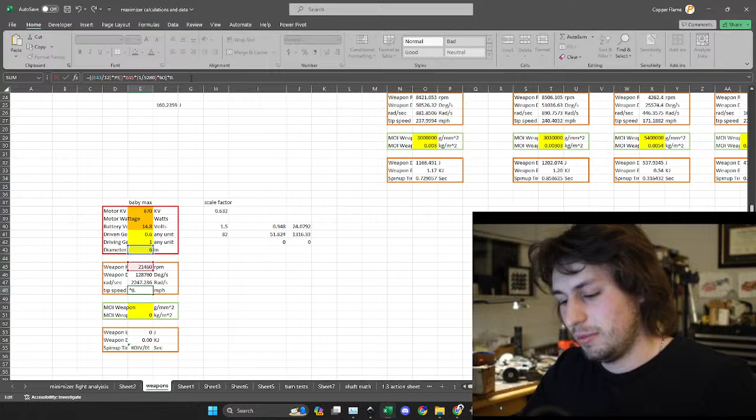I mean, if I gear it like that, if I run it at, what, 80% of that? If I top it out at 70%, that's reasonable. Then I don't have to do the weird gearing, and that motor will have plenty of power. What's the motor weight? Well, this one is 200 grams, which I've been told is too much. So if I do the Badass 2814, then I can do 1-to-1, and that's way nicer. So let's do that.

Are you saying that that's too big? That's what Droopy runs, I guess. What do you mean that's too big? So, okay, we're back to this. This is 50 millimeter diameter, so it's a little... Now that I think about it, that's a pretty big gain. Because if this is 50 millimeter, yeah, that's... Can you guys trust the process? Thank you.

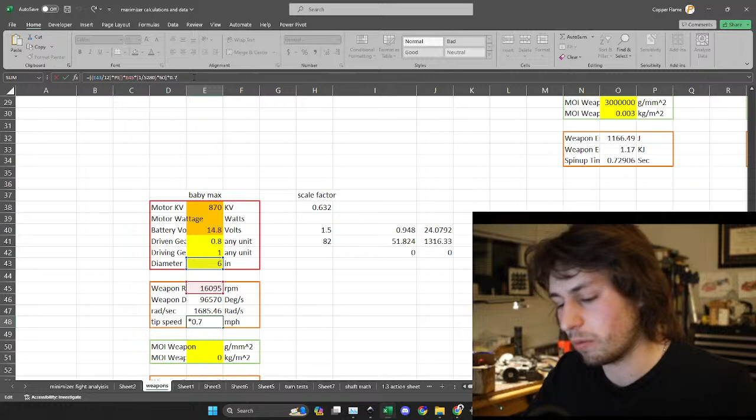I feel comfortable going up on that side in size. That's not terrible. Because if I go up to like a 0.7, a 0.8, and I run it at, let's say 80%, that's much more reasonable. Switching that from 0.3 to 0.4 doesn't actually end up making it that much larger. Okay, that's actually not terrible. That 870 kV Badass is going to be the ticket then. I didn't know if that would have enough wattage. A cogged will be fine. Yeah, if it's cogged, you can get it super tight.

I've seen Toby on Eileen. Oh my gosh, those are minuscule pulleys. Even on the non-cogged ones, you can push them pretty tight. Like on Psycho, he's got an idler there to push the wrap tighter. It's pretty impressive how he's got that set up. I know that's like, oh my god, Jameson did something impressive, but no, it's so cool. Yeah, that's just gonna be more reasonable. Thanks for talking me out of that. That's way cooler. Nice. Okay.

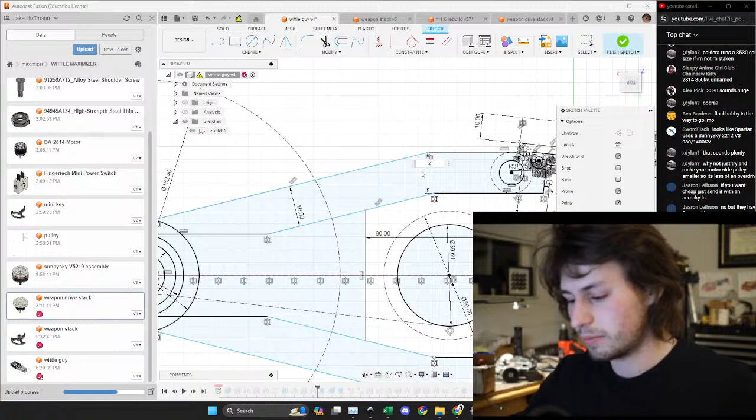Ooh. Okay. Kenny just sent me something for the art for Maximizer, and it looks amazing, but I'm not gonna, like, I don't know. Should I show it off on stream? Is she still in here? We'll see. It's gonna look great. It's gonna look really cool. I'm very excited about it. I'll probably throw it in a video.

I don't know if I'm gonna get another video out before March is over, which is why I'm streaming right now. Because it's like, well, if you're at the event, you'll see it. It's gonna look amazing. I'm really excited about it. Okay. All right.

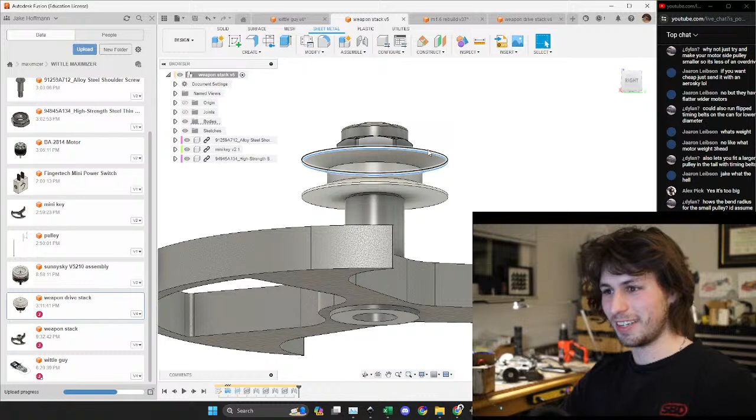Making you feel insecure about how scuffed my CADing is. Oh, you have no idea. If you think this is bad, oh my god. I'm very messy. Well, I'm being not messy because I have people watching me. It's like driving. You get really careful, or like driving with your parents or whatever, where you're being extremely careful.

Mr. Farkas is gonna be there. Let's go. If this is overweight, I might need a minibot driver. I might hit up y'all's pit tail. Or man, if I want to win, I'll get Nate Franklin to minibot for me. He knows how to pick a bot that'll win a fight, I'll tell you that much. Dang. Dude is the king minibot driver right now.

Ooh, Kenny says secret. Okay, secret. It looks really good. Is my mic quiet? I can turn it up. Is that better?

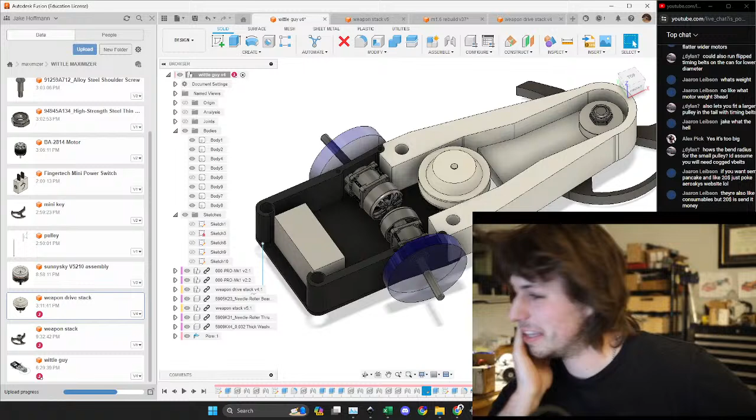If we want to do, I don't want to do Q&A. I mean, we could do Q&A. The Q&A from, okay, that was not a real thing. Okay, the Q&A from the 12-pound chat. Someone pinged me about something, oh God. Okay, hang on, 1 sec. The Q&A thing from earlier, it was real. Shut up, Jaaron. Okay, I'm starting up Discord. I'm hiding my screen.

Big Jake, turn up your mic. Okay, I turned it up. Jaaron, do you want to come read through Q&A with me? Do I need to turn my mic up again? Is it still too quiet? Okay. I'm sending you an invite. Okay, you have to behave because we are on stream. I just invited you to a chat. Okay, stop posting Q&A in 12s. Please post it somewhere else. Please stop spamming 12s.

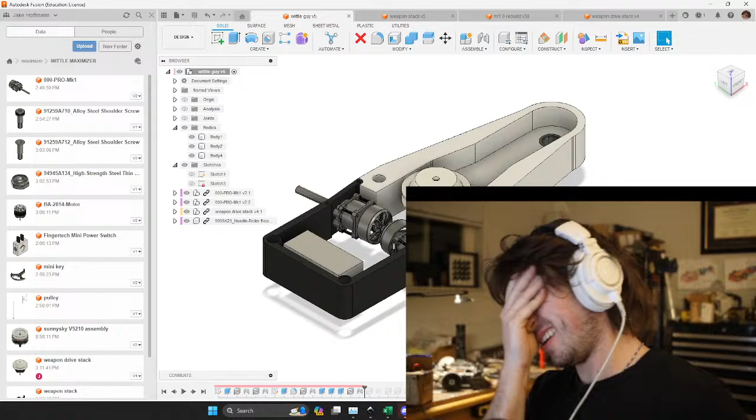Oh my god. Yeah. That's not... Oh god. I literally cannot... Do you know when and where the max was established? Oh my god. Dude, my DMs are a tidal wave right now. Your Discord DMs? Yes. Why is Zach just texting me 1? He's just counting up. Oh my god. We're gonna get in so much trouble tomorrow. I'm gonna be in so much trouble tomorrow. Dude, look at this. Oh my god, Zoe, stop. Oh my god, she's doing it too.

It's an audience of 30 people, okay? Yes, Zach's doing that to me too. The fact that you all can't behave in front of an audience of 30... That's nuts. That's like a small Starbucks. You can't even go out in public at that point. Oh my god, that was a big mistake. I thought that would be a funny bit, and I thought that people would behave, but I was mistaken. Zoe, I'm not gonna be your emotional support human at Moto now. Alright. I was thinking we could do react content, but react to what? The numbers in your DMs? The only thing I can react to right now is the amount of spam happening in my DMs. Stop, dude.

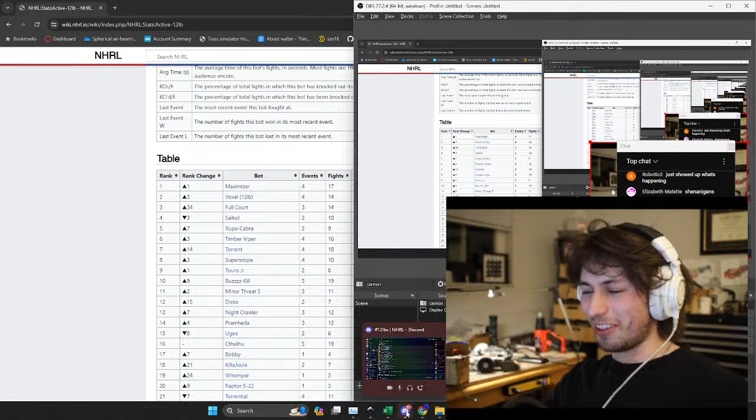You can see my screen, right? Yeah, you can, through the live stream. Yeah, through the live stream. Yeah, look how many... Discord's just been slammed at 9 plus for 30 minutes now. Wow, I'm surprised Zach stopped. I know that's gonna get him to start again, but he had very little resolve to continue that chain. Well, because he started doing it to me, dude. It's not so much.

Alright. Send fights in chat and I'll react to them. React to the second fastest KO ever in 12 seconds. He's such a sweat. Dude, this sucks. Oh my god. Dude, I thought it would be fun to stream. Oh, that's really loud. Is that an okay volume for everybody? Or is that too loud?

This is where Zach and I met, and every time Zach gets the chance, he watches this fight because he enjoys it. Bro, can you see this one? Man, your face cam is even worse than the Norwalk driver cam, dude. Is it too large? It's so big. It covers almost a quarter of the screen. Let me turn it down. Okay. I'm just getting used to all the stream commands. Is that better? That's better. Does it cover up Zach? I don't know if OBS is covering it right now. That's fine. No, I want it to cover up Zach's face so it looks like it's me versus me. I don't want to give him the satisfaction. No free promotion. Yeah. Okay. Perfect.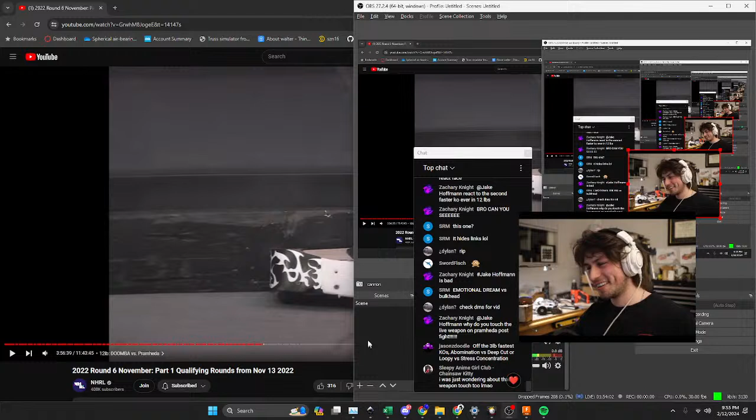Okay. Why did I come up to Zach's weapon? Yeah, watch this. The moment the door opened, my fingies just go straight to it. It just didn't even compute to me that I shouldn't touch that. Well, it wasn't as bad as earlier. Earlier in the day, I fought the original version of Herbie. Dude, watch what I do after the fight. Okay, the fight's fine. Like I won. I was shaking. I was so nervous. Because this is like my third fight ever, by the way.

I walk in, I pick up my robot, don't turn it off. Here we go. All right. Oh, wait, put it back. Gotta put the weapon lock on. I just walked away with it. Yeah, we did. Okay. Off the 3-pound.

Abomination versus Deep Cut or Loopy versus Stress Concentration. I need to watch more 3-pound fights. I'm glad you're here for this. Why? Because of me? Yeah, I don't watch 3-pound fights, but I'm gonna watch them now. I don't know what to look for. Abomination versus Deep Cut. I just watch my own fights. Oh, this is... oh, jeez. Damn. Oh, wow. Wow.

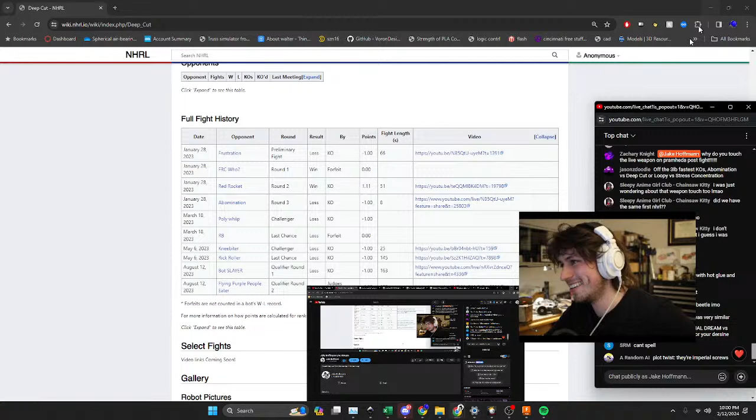Zach is pleading to me to let him in. He wants to be on. Zach Knight wants to be on stream. Yes. Oh my god. That's a bomb waiting to happen. Is he gonna behave? Plot twist. You know him. Imperial screws. Yeah, he'll behave. Alright. Maybe. What do you mean? He'll behave. It's another fight. Oh, here, Frank, that's actually what I was looking for. Zach doesn't want to be on stream. Oh my god. Not you two, Zoe.

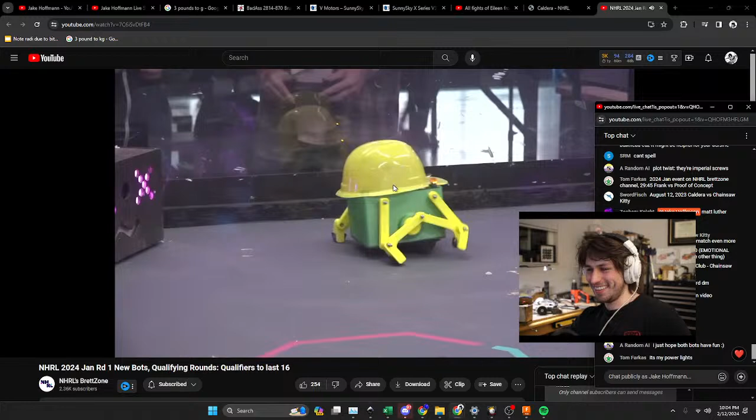Oh my gosh, I didn't realize the lights work. Are the lights connected to the main electrical? Or are those their own thing? I think they're their own thing. Oh my god. Oh, that mechanism is so cool. It's my power lights. So it is through the... Look, they spin too. That's sweet, dude. They're full on beacons. It's great. How is this 3 pounds?

Is it? I mean, I guess it's 4.5, right? Or 4. I thought it was 4.5. I can't keep track of the weight bonuses anymore. It's 4. Stay in your weight class. Dude, I've given up on keeping track.

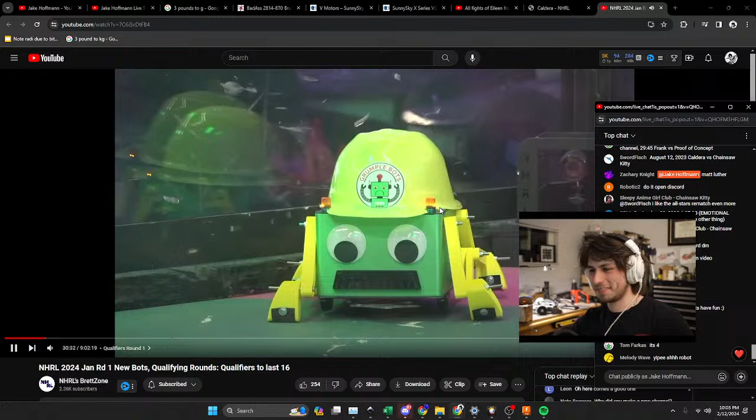Yippee, robot. Yeah, look at that. They're like swirling at the same time. That's sweet. NHRL weird. He even has a Sparky tattoo. He loves this event.

Dedication. Fight, robot. Wait, Tom, is that true? Do you have a Sparky tattoo? Wait, before this fight plays, is that true? Is that a lie? Do you actually have a Sparky tattoo? That's awesome. What a suspenseful story. Okay, the one DM that I'm gonna open is a picture of Tom Farkas's. Wait, no way! Wait, send it. Okay, that's all my Discord DMs, the one that I'm gonna open, everyone else is getting blocked. I want to see Mr. Farkas's Sparky tattoo. Were you the one who posted it on Reddit? Is this the second one?

All right, I'm playing this fight. Here it comes. That's awesome. Fully out of the pink corner. Look at that walk. Oh my god. What's happening? Dude, he's weird strutting. Weapon to weapon. Oh no. Being gentle with the initial punch. The power lights are still on. I mean, that doesn't look too gentle to me. His hat turned into a flat cap. The hat dented in. Kyle, do you see the spinning weapon? No, that's all gone. Oh no, his mustache. Oh dear.

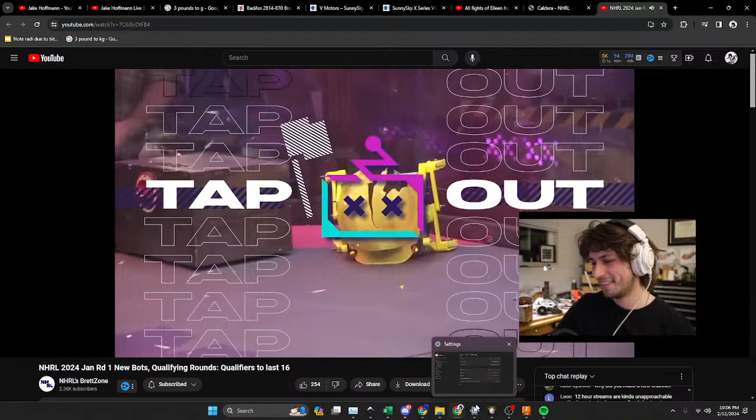Proof of concept, Brandon Unger. This is a hub motor disc spinner, a drisk, if you will. And man, it hits hard. Poor Frank. Poor sweet Frank. Oh, the hat. I'm glad that Brandon let Tom walk. The fight was shorter than Frank's walk to his corner. I actually think you're right. I think it took Frank longer to get to the corner than the fight was, and I don't even know where that weapon went. It's in another universe at this point. Maybe the ceiling.

Brandon, we've seen him and Tom at this event like a million times in the past. They're both here all the time. Good people.

I think we're gonna call stream after this because there were no other reacts, and I have a lot of message requests. Oh, sweet. No way! That's sick. That's a lot, Tom. That's awesome. There you go. There's a recommendation. Okay, Brett Zone 553.

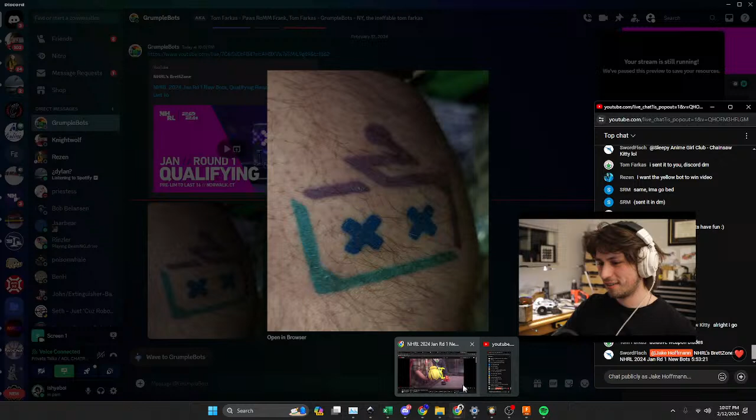React content. Oh, these are cage 3s. Oh my god. Let's go. Hang on, you can see me soy facing in chat probably. Oh my goodness, I am so happy about this. It's Verticalizer. I forgot you weren't at January. No, I was watching every step of the way. That sounds creepy as hell. What? I was watching Verticalizer. It wasn't creepy. I was completely addicted to its story. I think it dies here, though. I can't remember.

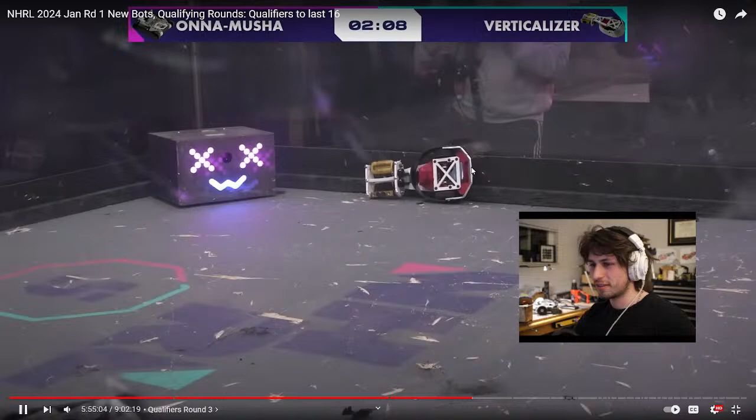That plow is crazy. Yeah, it's aluminum. Honestly, that might not be a bad idea. Cause you could do steel, or you could do like 3/16. I mean, I guess, but I'd personally just get the ti and bend it at Norwalk. True, because you just bite the aluminum. Dude, it's tight. It looks good. It's like actually moving, shockingly tight. I need to look at how they're doing that bulkhead, because that's the way I want to do mine. See how they're using the TPU and then bolting into it? That's what I want to do. The motor placement too, they're all the way in the back.

That UHMW is really thin too. I guess I could get away with thinner UHMW like that. I'm taking notes, Verticalizer team. You're clearly using too much UHMW on my Beetle. I've got it vertically, it's over an inch thick. It's 30 millimeter. Oh Jesus. And then it's 16 millimeter thick back to front. You really are a 12-pound builder. So that might be where some of my weight's at. Seeing this actually helps. I'm taking notes, Verticalizer. They're clearly leaps and bounds ahead of me in many ways.

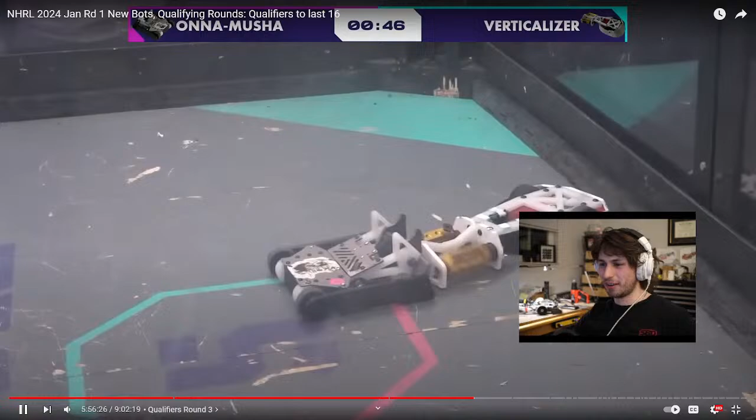Look at that thing. Oh no, the one side's down. That's a good one. 12-pound Verticalizer, modular. Oh, it's on the way. It's on the march. Modular max. It's the Yobnall blade on the back. When Chris asked me about welding his bar back together, he actually meant me doing that. Time to put a swag bar or whatever it's called on it. Oh, yikes. I forget what those are called. Swole bar. Yeah, the swole bar. Casey's swole bar on the back. That would be sweet.

The spinning is really tight on Verticalizer. I'm gonna be honest, it does not look bad. It just needs to shift the pivot point like you do, because it just keeps not getting the reach, I guess. It's also weird that it doesn't gyro when one of the weapons is down. Or maybe that's it gyroing. I guess it would be in plane, or like perpendicular to the long plane. Well, it's such a long robot and such a small spinning mass that it probably doesn't have enough mass altogether.

How do you judge this robot? How many weapon modulars are... Oh, wow, they're actually running cleats on it. Oh, that's why it's moving so good. Doing the Euclid. Yeah, it's the snake teeth, or the snake tongue cleats. I see you, Verticalizer team.

Wow, you don't even know their name. It's ASML. No, I know. Oh, it is, okay. Yeah, it's ASML. I don't know who it is, because the only guys that I know are Ethan on ASML and Jake Abekine, I think that's his last name, because they were the guys that I fought first with Maximizer.

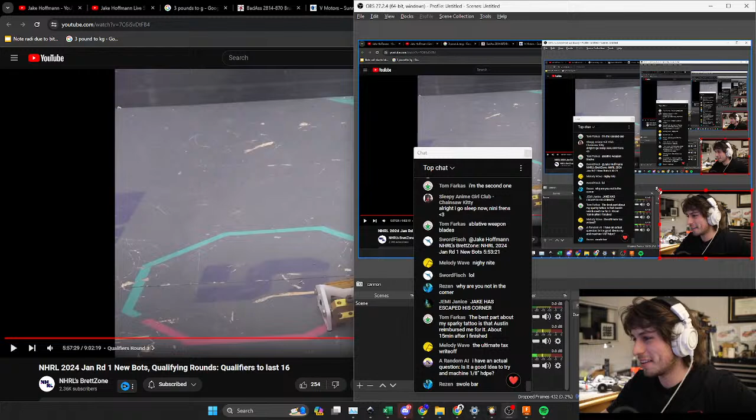No, I messaged Chris from NHRL and asked for a good image. He asked why, I told him, he said Austin would pay for it. I got it done in Tennessee. Oh, okay. That's still sweet though. Just send him a picture of the bloody tattoo 15 minutes after. That's awesome. I thought you walked up to him at the venue. Well, they had a tattoo artist there at one point, right? Did they really? When? Wasn't that a big meme? People were complaining about how irresponsible. I think it was at finals.

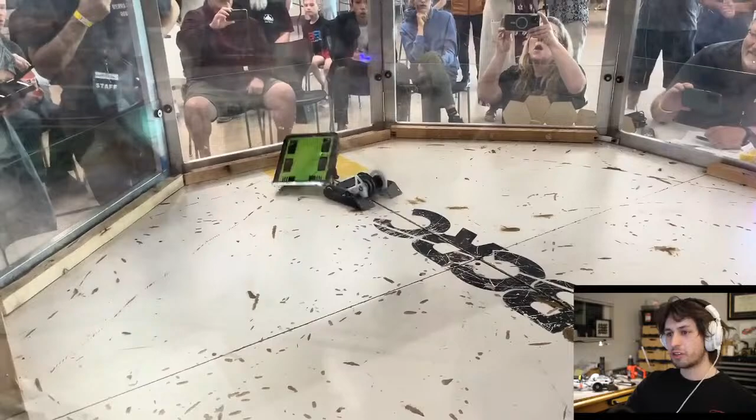Oh jeez, the duct tape. This is about to be a yard sale. Yeah, you did a better job there. See how much better of a hit that was? That was awesome. Holy crap! Why are they all using stupid motors? Whoa! Oh my god. He's pinging me now too. Now I have 5 pings in my chat. Nice. That was your very first fight out? Yeah, she bodied both of those robots. That's a good first.

Look at your phone. No, I'm not looking at my phone. Oh my god. Oh no. Is your Instagram blowing up? Holy shit. Dude, Zach. Stop. I have 500 texts from Zach. 100 texts? 500 texts from Zach. All right, 2 hours. Okay, 2 hours is the perfect time for a stream.